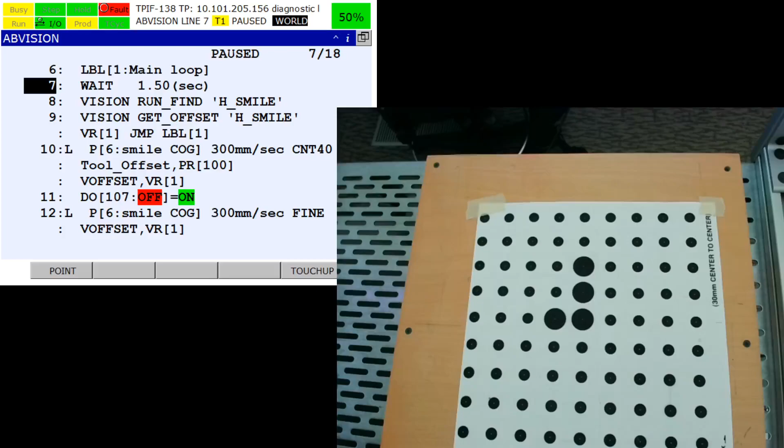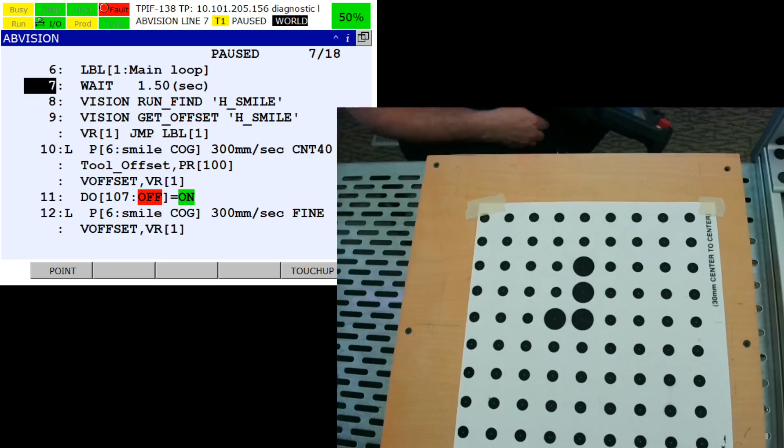Alright, so here we're going to teach a single view vision process. So a 2D single view vision process. So the first thing we want to do is set our frame. So I'm actually using frame 6 here, and I've got my grid set up. And so frame 6 is set up to match our grid.

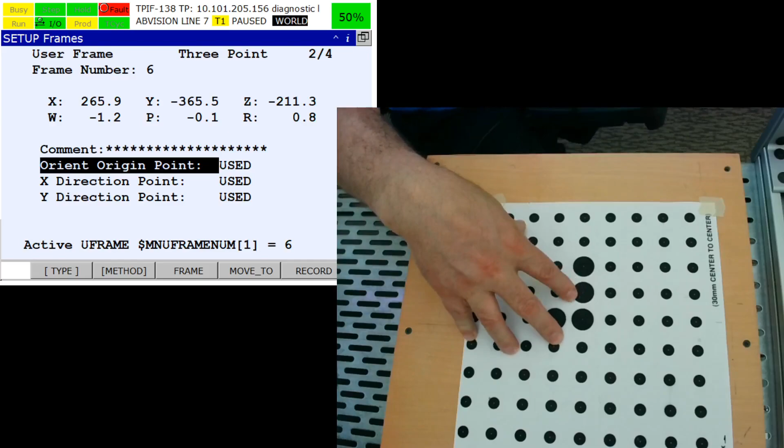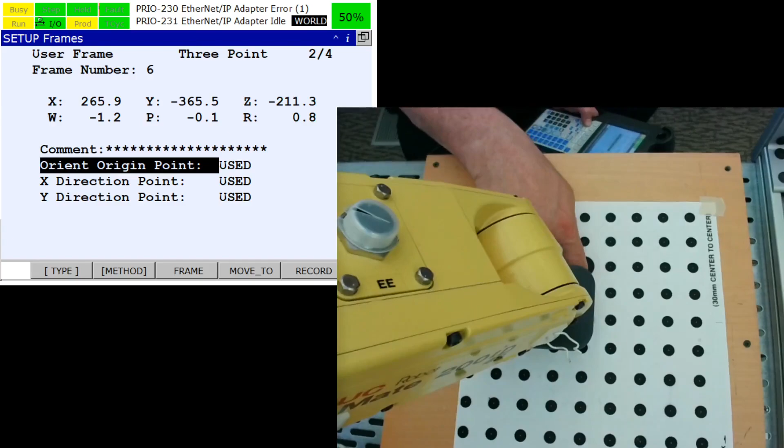And so before you do anything else, you just want to make sure that your frames are what you expect them to be. So I'm just going to use the move to function here and go over here and just kind of show you that that is in fact my origin point, and I can go to my X point and go to the Y point. So you can see that I use the 3-point method here to teach the frame. And so the grid that we're looking at matches the frame.

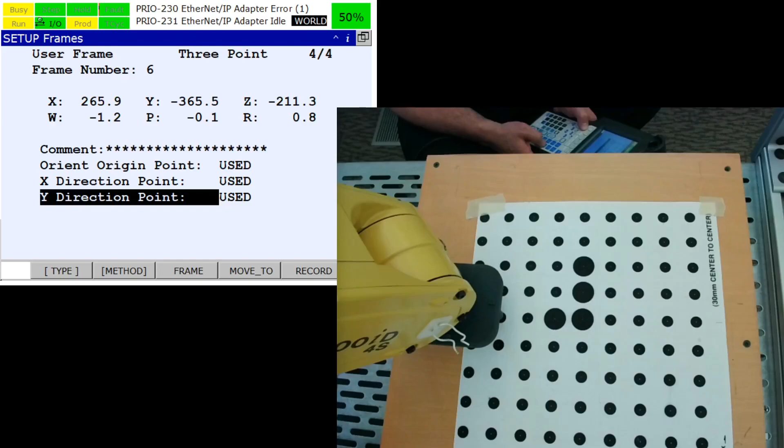And so the next thing that we want to do is teach the robot to pick up a part. Okay, so we want to teach the robot to pick up a part, or in this case I just have pointers attached. So I'm going to teach the robot to see the part. All right, and so what I've got here is this little smiley face that I'm using to teach this. I'm going to teach it to go to the right eye, and so I'm just going to line that up on my grid.

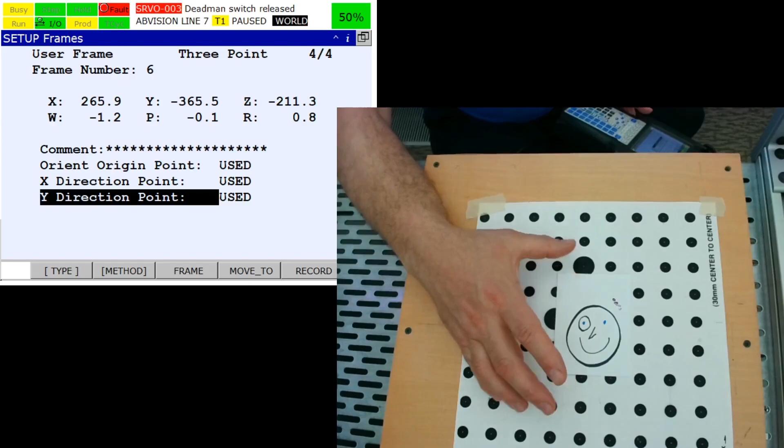So when you teach a part, you want to teach it to match your grid. Okay, now this grid, we need to make sure you calibrate the camera to your grid. I've done that in a separate video, so I'm not going to do that right here. That's already been done. But I'm going to teach this part. But before I teach the part, I'm going to write a program to come over here as if I was going to pick this up.

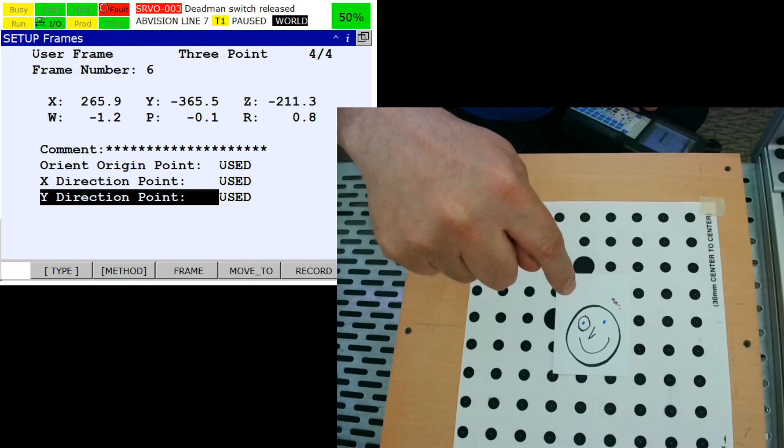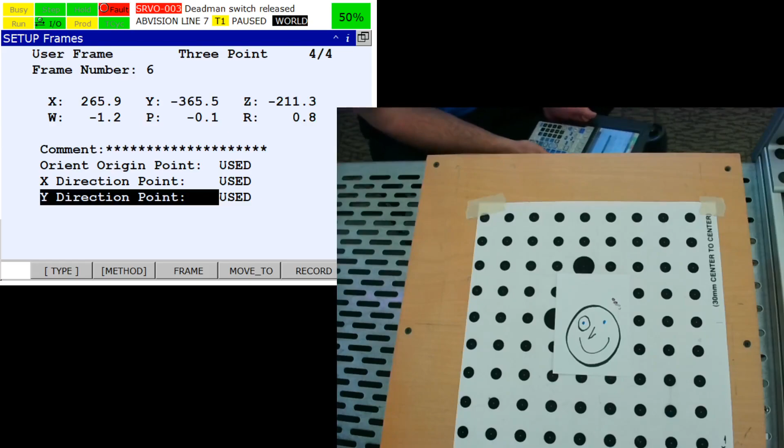And so we need to come over. We need to use a tool offset and then come down to the part and then return to our tool offset and move off to wherever it's going to go if it was actually picking up the part to stack it or place it inside of a CNC machine or robo drill or something of that sort. All right, so I've already actually created the program. The first thing I'm going to do in my program is use the frame commands to set my frames. I'm actually using tool frame 6 and user frame 6.

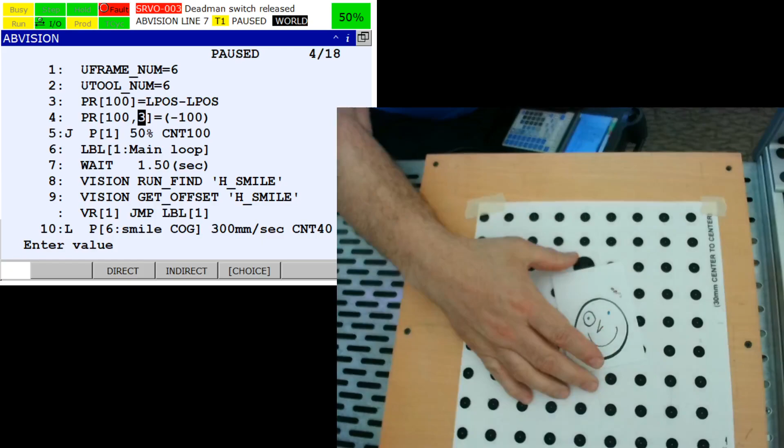And then we need a tool offset. So I've got my position register here, and I'm just zeroing it out. I'm going to use position register 100 for my tool offset, and I'm just using LPOS minus LPOS, which is going to zero out my position register. And this is going to be a tool offset, so I'm going to set my Z value to be minus 100 millimeters, so it'll be 100 millimeters above my frame. Remember, plus Z is up for the user frame, but using the tool offset I'm using a minus Z because it's going to be the offset from the robot.

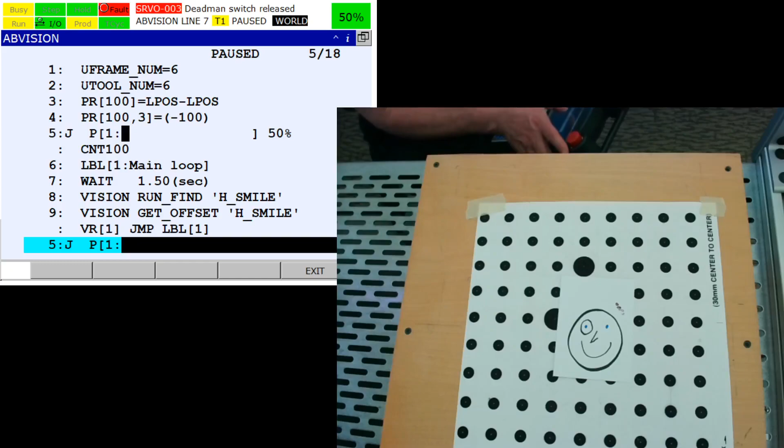So then I have a home position here, so I'm actually going to label this as home position. This is just going to be a home point, and there are two major points about this home point: number one, that this point is out of the way so that the camera can take the picture, and it's also out in a clear area. It's not obstructing the view from the camera, and it's not near an object, so it's not going to hit any object.

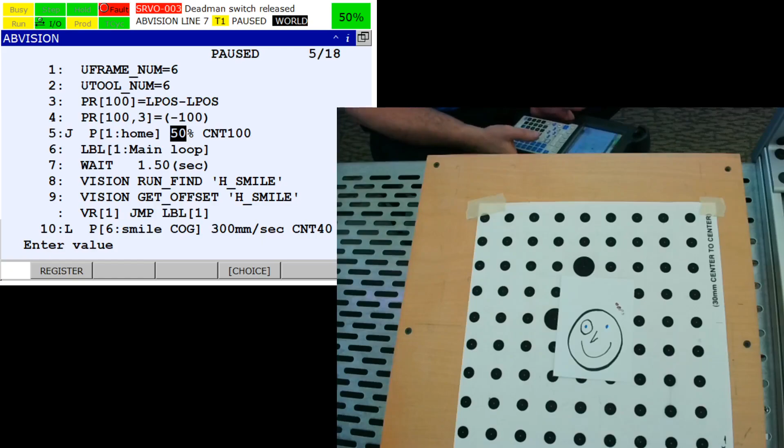So we're going to start the program basically by, after we set our frames and initialize our tool offset position register, just making sure the robot is in the home position in case it wasn't left there. Then we're going to have a label here, so we're going to loop through the program and return back here. And then I have a wait statement here.

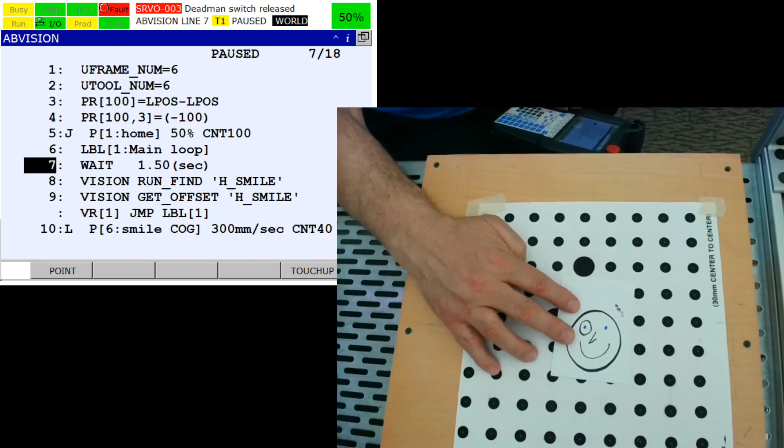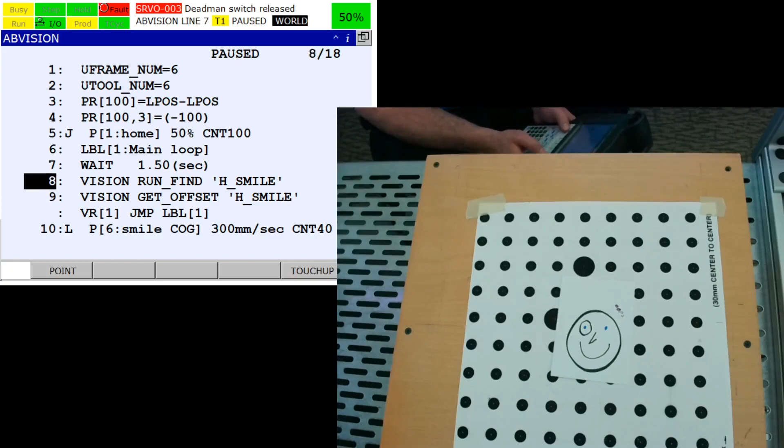Now, a lot of times you may not want to wait, but in this case we're going to be moving our objects around or taking them away and putting them back. And so we need to give it a little bit of time so we can move it around when we're testing the program. That's what I have the wait for in here right now, so it's not really a critical wait. And then we have the vision commands. Now, at this point, I don't want the vision commands, so I'm actually going to delete these out of here for the moment.

Should have deleted both of them at the same time, but I didn't. So, we're going to have our thing. Now I've got the vision offset here, I'm going to take those away.

I'm taking those away because I just want to show you the main program. So I'd already had this working.

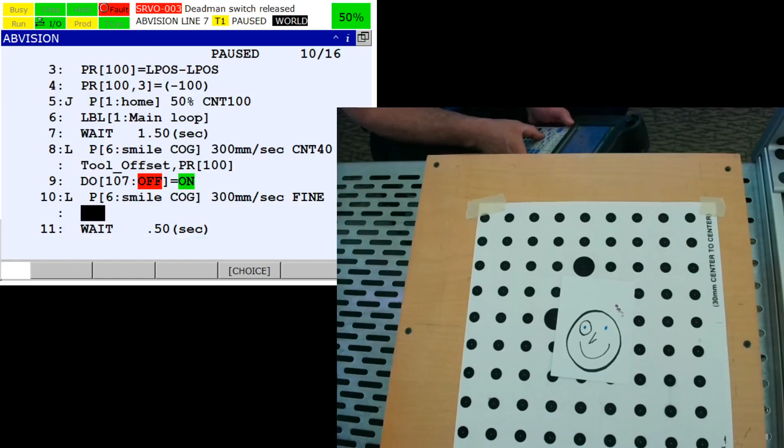All right, so here's my program. What I'm going to do is have 2 points: the home point, and another point which turned out to be point 6 because I started this program from another program here. So this other point is point 6, which is actually just my second point in the program.

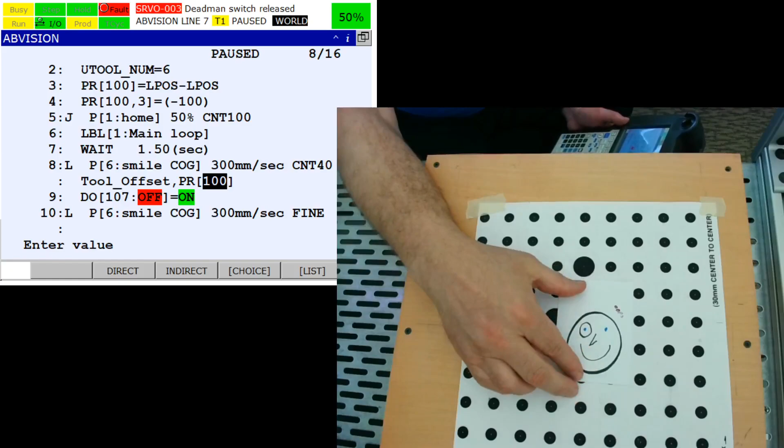But on line 8, I have a tool offset, so I'm going to be 100 millimeters above. And then I'm going to come down to the eyeball, the pupil there. So I'm going to be 100 millimeters above it using this tool offset.

Then I'm going to come straight down to it, slowing down a little bit as we approach. And then I'm going to turn on a light there, and wait about half a second, as if I was opening or closing a gripper, and then move off.

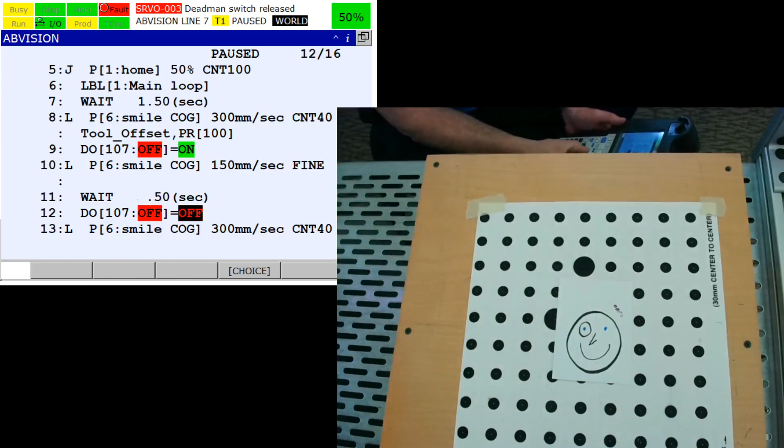So I'm going to move back to my offset, and then in this program I'm simply going to return home and then jump back to the label. So that's all I'm going to do.

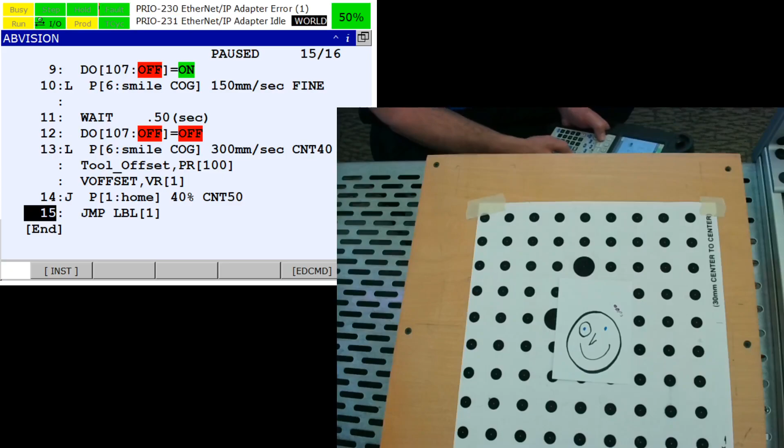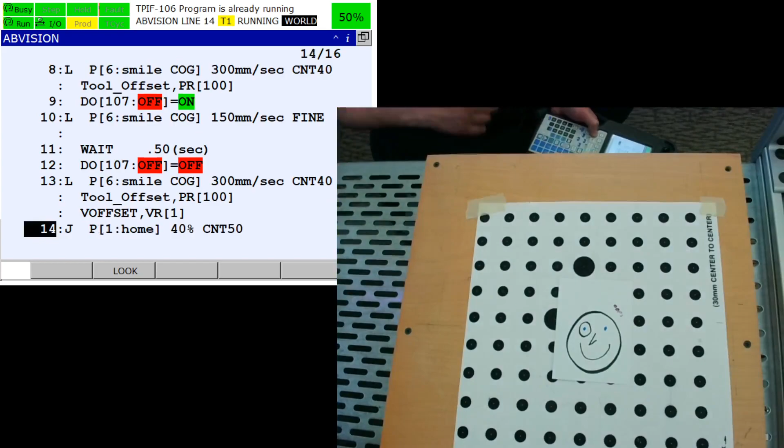Let's go ahead and run this program. Right now this program has no vision in it at all. It just comes over here, goes to the offset, comes straight down, and then returns.

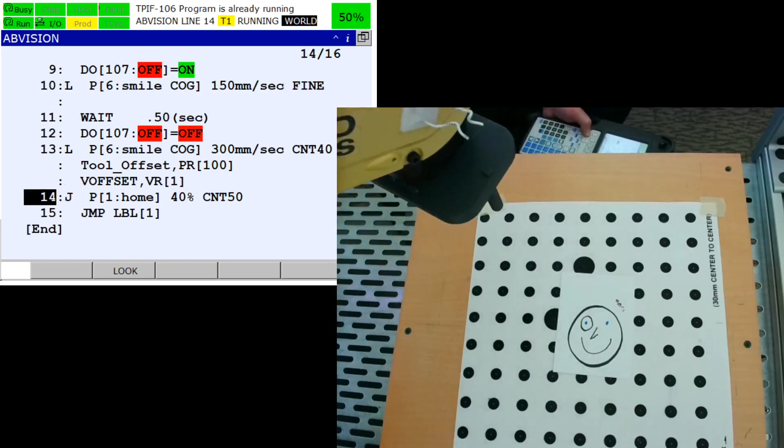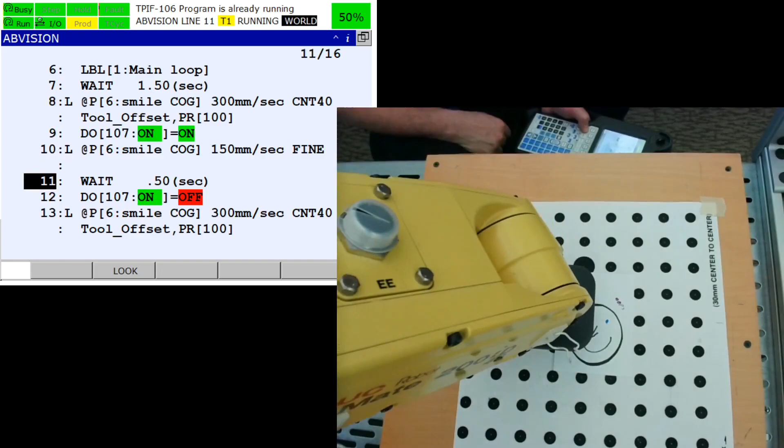It should be returning right to the pupil on the eye there. Okay, so it's just coming down to the origin point on there. So that is the program.

All right, and now we're going to add the vision to it. So the first thing we need to do in the vision is come over to our vision setup.

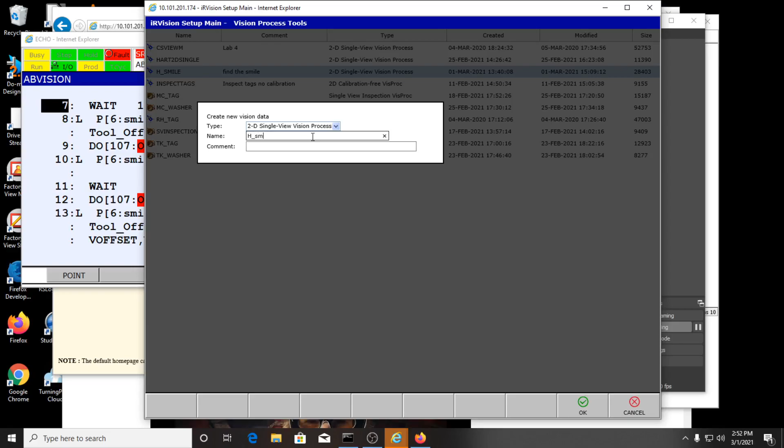Okay, so we need to come over here, and we're going to go to Vision Type, Process Tools, and then create a 2D single view vision process. And I'm just going to call this H Smile 2 because I already have one here.

And I could put a comment in there. And I'm going to double click on this now, and you can see everything's red in here because nothing's really been set. So now I've already set my calibration for user frame 6.

So I need to come here and set my frame to frame 6, and I need to select my calibration here. And so this is my calibration. I may need to adjust my exposure a little bit.

And then we're going to go to our geometric pattern match locator tool, and I'm going to say teach. I'm going to come over here and draw my box just around the smiley face. Make sure you leave a little bit on all sides of the smiley face so it has at least a little bit of, in this case, white color around the dark.

Okay, so here you see the smiley face, and there's some extra stuff up in here. I want to ignore that, so I'm going to come to mask. Now, a lot of times I say mask everything, but in this case, all I really want to do is ignore this over here in the top right corner. The rest of it is actually very unique and very easy to see, and so it matches very well. But I just want to ignore that top right corner, so I'm going to set my mask.

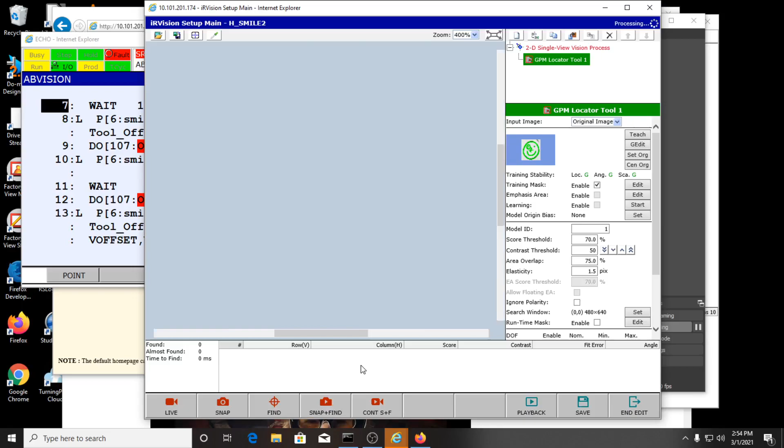I'm going to do a snap and find, and we see there that it's looking very well. But notice the 2D single view vision is still not correct, okay? So what I need to do is come over here and set my reference position and hit OK.

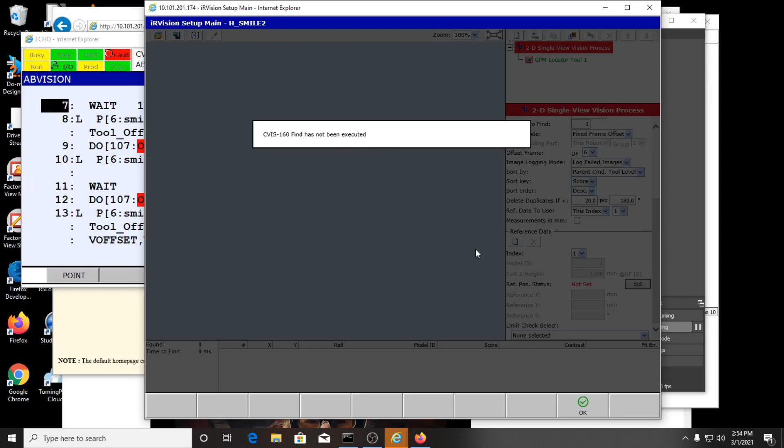But I did set, and I need to read the error message. It tells me I haven't done a find yet. So even though I did a snap and find over here, when you come back to the single view, you actually have to do a snap and find again. Okay, so you do the snap and find on the single view vision process, then you can set your reference position. All right, and so you can see here that the reference position is minus 14 millimeters in the X, minus 13 in the Y.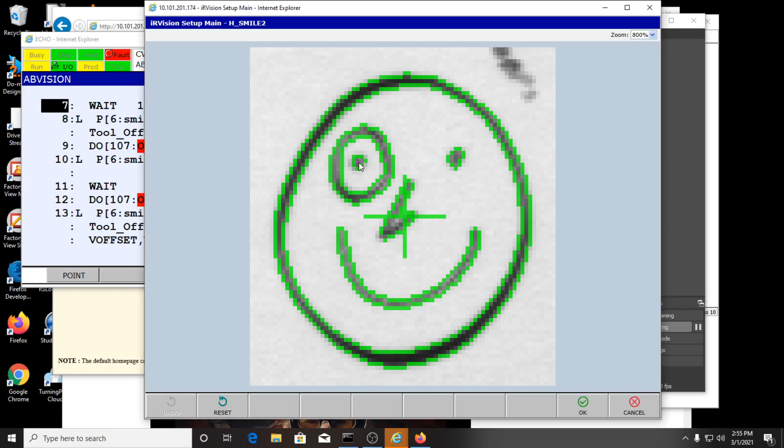Now I want to point out that the reason for this is the origin. So if I come back to my geometric pattern match, I laid this down so that the eyeball is pretty much at the origin of my frame. So I'm going to come over here to set origin, and I'm going to set the origin to be the pupil of this right eyeball. And so now when I come back, I'll do a snap and find here. You can see that the crosshairs are at the pupil of the eyeball now.

So now if I come over here, do a snap and find again, and now I do the set, notice that these values, it's not perfect because I'm a couple millimeters off from my actual origin. But you can see that the numbers are almost zero, 1.8 and 3.5. So very, very small. So instead of being 14 millimeters off, I'm only less than 2 millimeters off in the X and less than 4 in the Y. Okay, so that is my values.

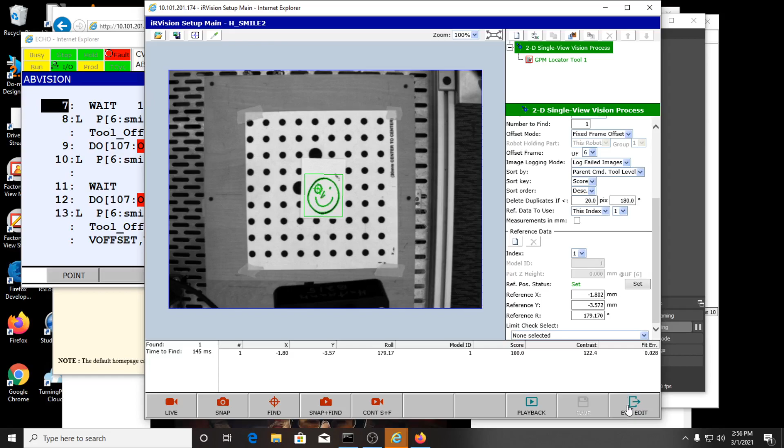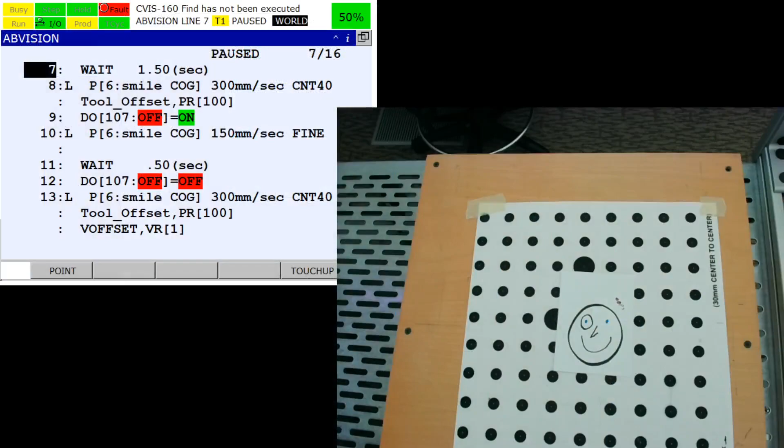Now remember this was called H_smile2. I'm going to save this, and I can end my edit, or I can just leave it open. It actually doesn't hurt to leave it open. But I'm going to come back to the teach pendant here now, and I'm going to edit my program. So I'm going to come here after this wait. Here's my main loop. After the wait, I'm going to insert a couple of lines.

And I'm going to go to instruction. Under instruction, I'm going to come over to vision. And the first thing I'm going to do is run the run find. And my choice there is going to be my H_smile2, which I just taught. Then on the next line, I'm going to go to instruction, vision. But this time, I'm going to run the get offset vision instruction. And again, I'm going to choose my Smile 2.

And what happens now, when it finds the part, it's going to calculate the offset and store it in a vision register. A vision register is a position register that is dedicated for the vision processes. And so I'm just going to use vision register number 1. And if it doesn't find the part, what does it do? It's going to jump somewhere, so I need a label. I'm just going to jump back to label 1, wait a second and a half in this case, and then try the vision, take another picture, and see if I find anything the next time.

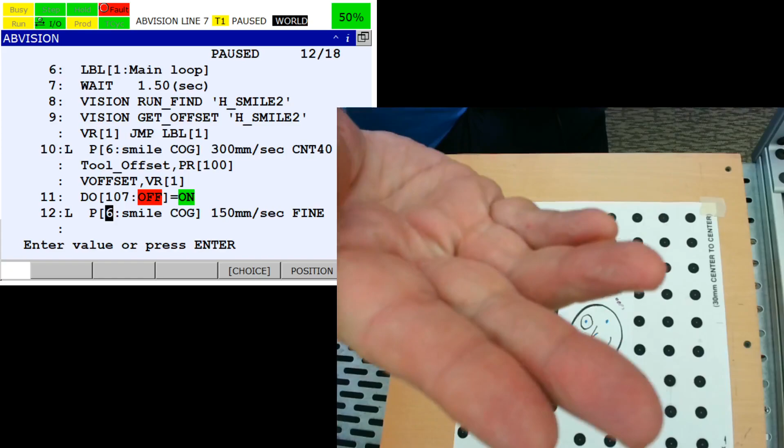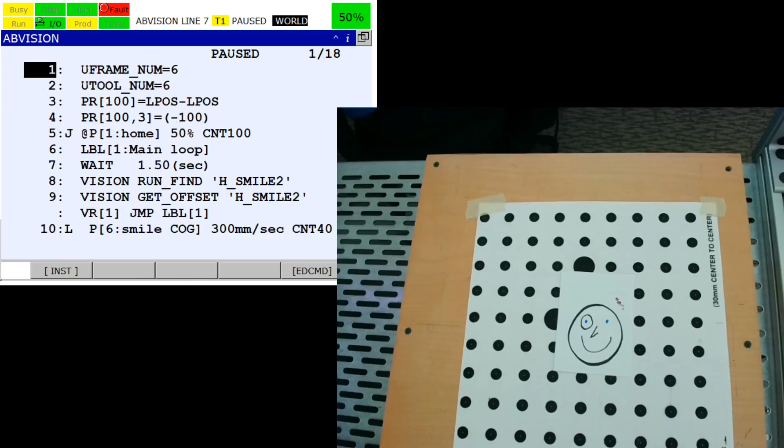And I need to do that for each of my 3 points. I have the point where I'm up top here, 100 millimeters above. Then I'm going to come straight down, and then I'm going to come straight back up. All 3 of those are going to need this vision offset added to them. All right, so all 3 of those get that vision offset added to it. And so now I'm ready to run this.

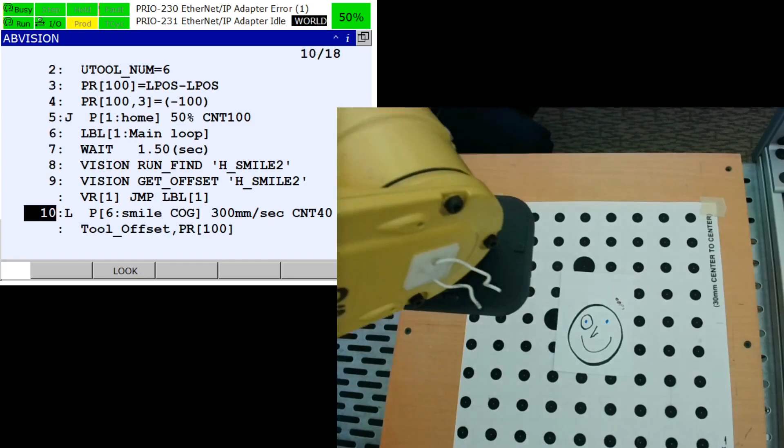Now I haven't actually moved it yet, so it should be pretty much right on the money. It comes down here to the eyeball and back up. So I've adjusted the camera a little bit so that we can see more of an angle. All right, so again, it's coming over here. Look at the command. It's at the tool offset, then coming straight down, and then it's going straight back up, and then it's going back off. And of course, it's just going to repeat that as long as it finds the part.

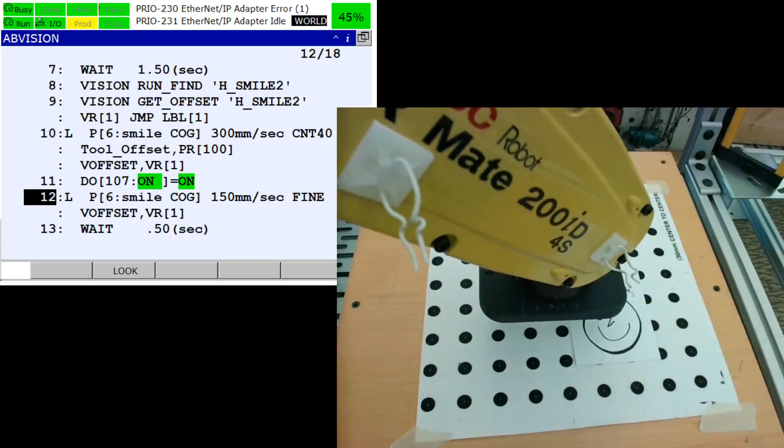So we come down here, and you can see it's going down there pretty much right on the eye. And so if I move it a little bit, it should make the proper adjustment and move on over. Okay. And if we rotate it some, then you're going to see it's going to rotate the tool to compensate.

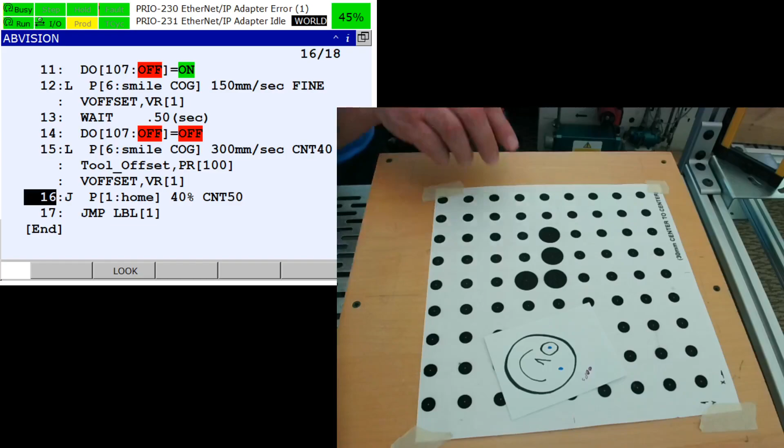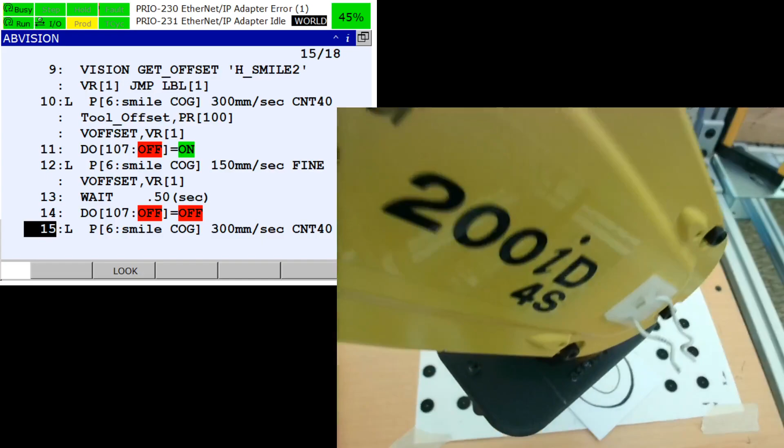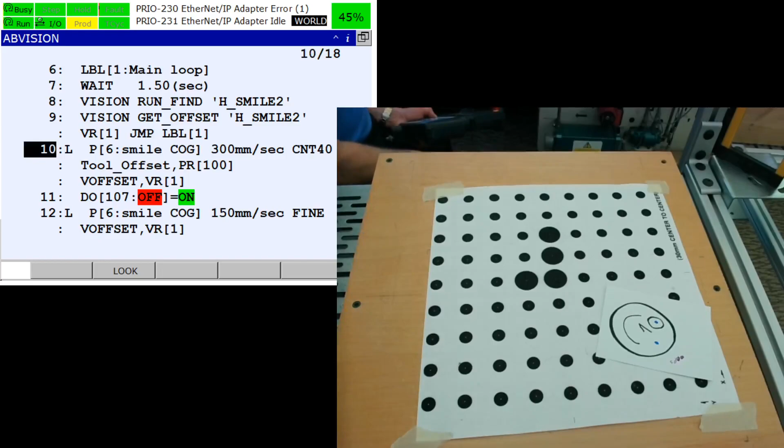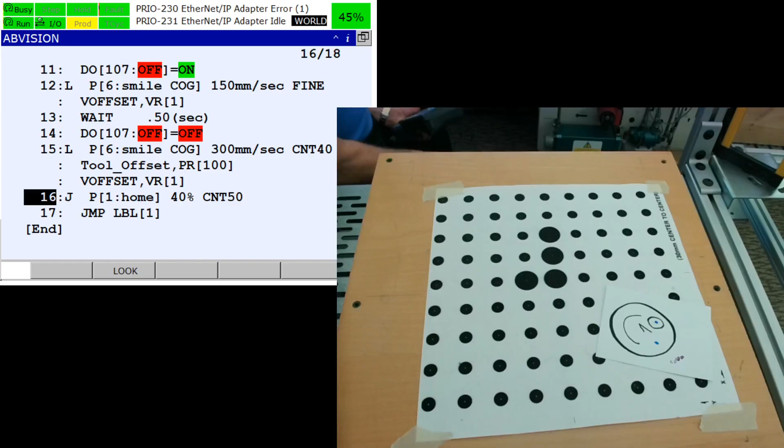So I just tried a couple of different rotations here. Right in front. One more try here. All right, so that is how you set up a single vision process.

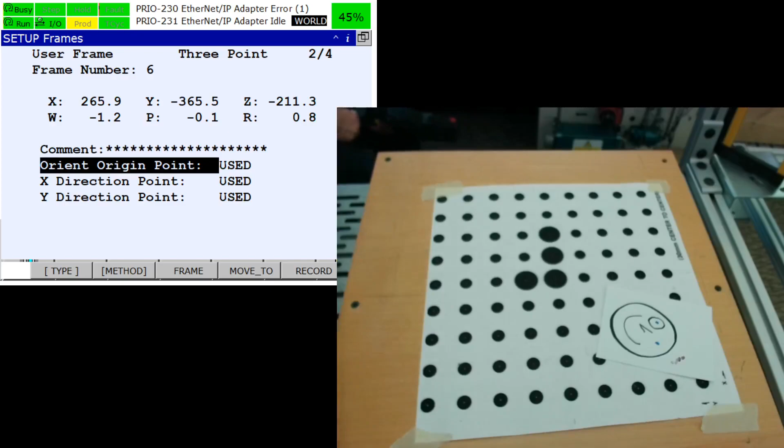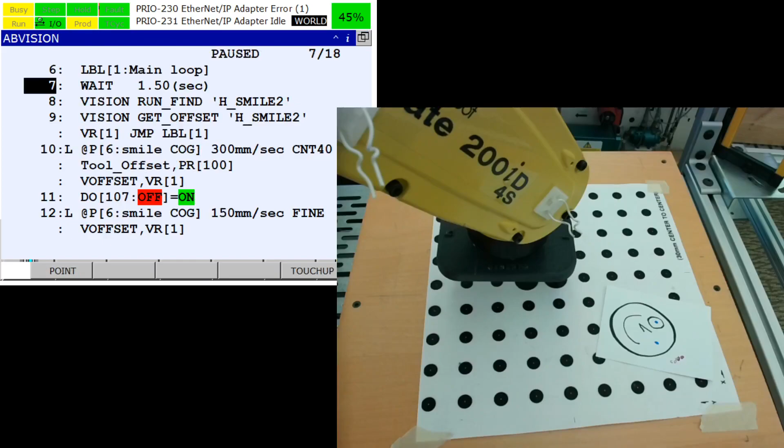Okay, so let me just reiterate here. One of the key things that you need to make sure that you do is start by double checking your frames. So go check your frames, make sure that your frames are where you expect your frames to be. Technically your frame doesn't have to match your calibration grid, but it's a really good idea if it does. It just makes things run a little bit smoother.

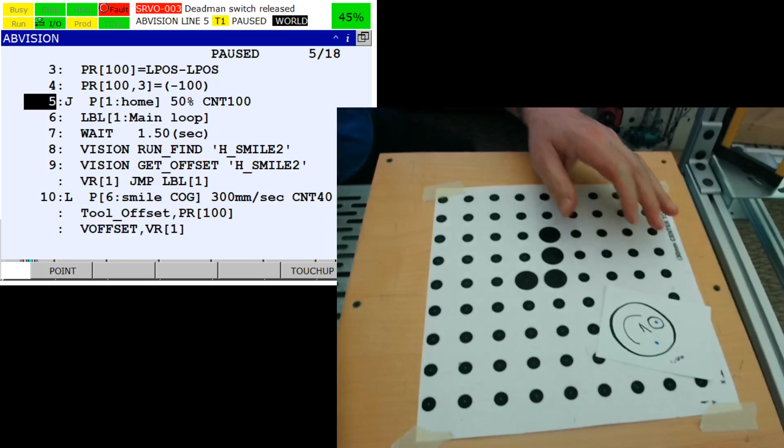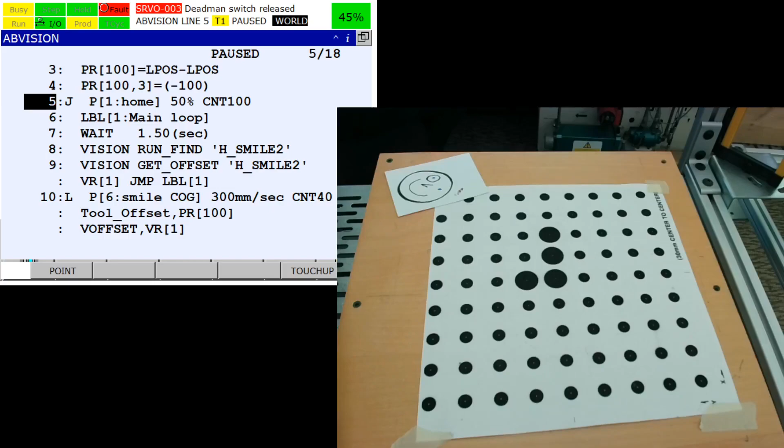Okay. So the other thing is that you have to make sure that your grid has been calibrated and not moved on you. And then you create your program. So the program should just go over to the part. It should use a proper tool offset before approaching the part so that it comes straight into the part and then leaves again straight. So remember, these are linear

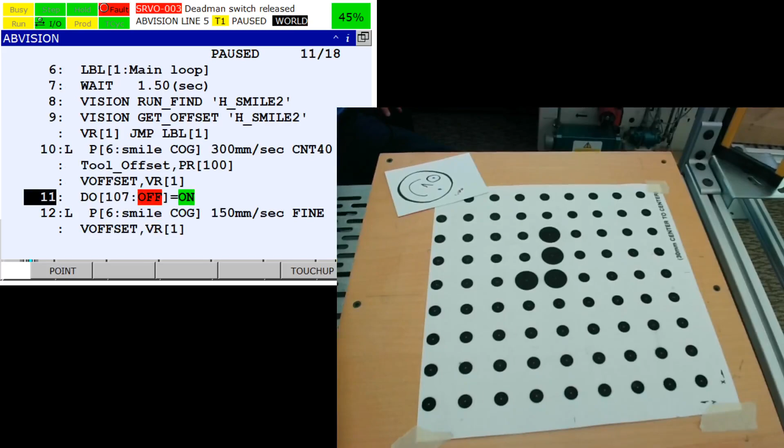straight down from your tool offset to the actual point where your tool center point would be on the part where you want it to be to open or close a gripper or process the part, whatever you're doing with it. And then return to that tool offset and then move off to wherever you're going to be returning. So you write the program, just an ordinary program without any vision.

Then you teach your part. So we would come in here, we would create a new part if we needed to. And then we come in here under the single view process. The first thing we had to do was choose our calibration. So we make sure we choose our calibration. Then we come in here, we teach our part, okay? And I don't want to reteach it at the moment.

But when you teach the part, make sure that you leave a little bit of area all around your part in your teach box. And then if you need to, you may have to come in and mask out some areas or mask out most of it and then just unmask the parts that you care about. If you wanted to, you could do an emphasis area, just like we discussed in the previous videos. And then you can adjust your thresholds and that kind of stuff as necessary.

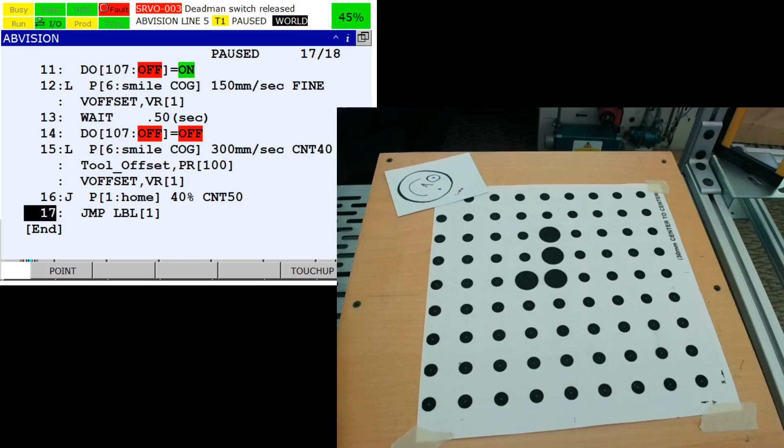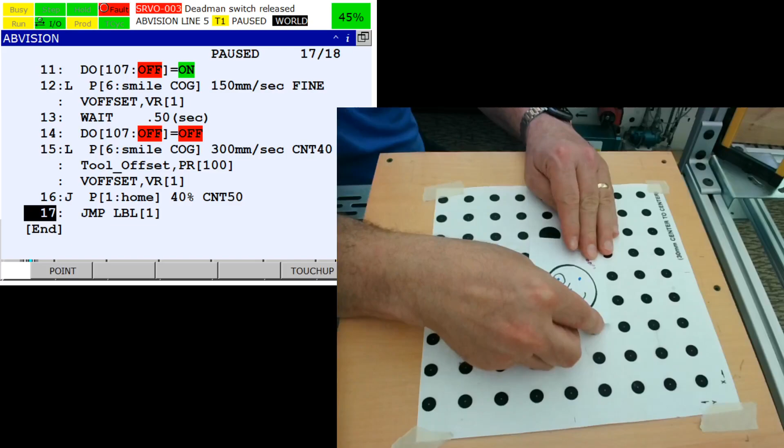But then you come back to the main single view. You do need to do the snap and find. And then when you do the snap and find, you need to set your reference point. So right now, if I set this, you can see these numbers are just out of town. So remember, to do the snap and find, you want to really put that part right there, line it up on your origin, and do the snap and find.

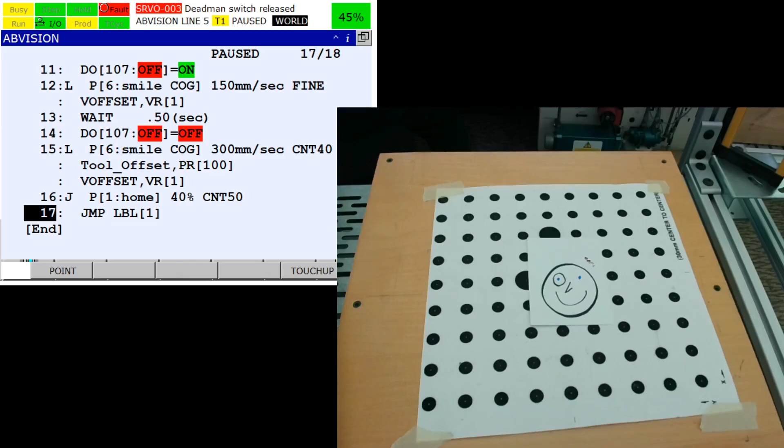Okay, as you can see now, I've got that lined up pretty well. And then do the teach, and you see here that was even a little bit better. I've got my X reference down below 1 millimeter and my Y reference down below 3 millimeters. So you really want to have that as close to 0 as possible.

One way that I recommend doing that, if you actually have a gripper attached, is turn the gripper on and have the gripper place it at the pickup point. So actually put the part in the gripper exactly the way you want to pick it up, and then run the program without any of the offsets, to have it move down and place the part exactly where you want the gripper to be grabbing that part. I don't have a gripper currently, so I can't do that, but that's what you want to do.

If you have a gripper, make sure you place it in the gripper just the way you want it, and then run your program just to the point where it puts it at the pickup point exactly where it should be, and then manually release the gripper and back the arm away so that you can then take your picture. That's when you should actually take your picture for the teaching section. And that way your reference should be virtually perfect.

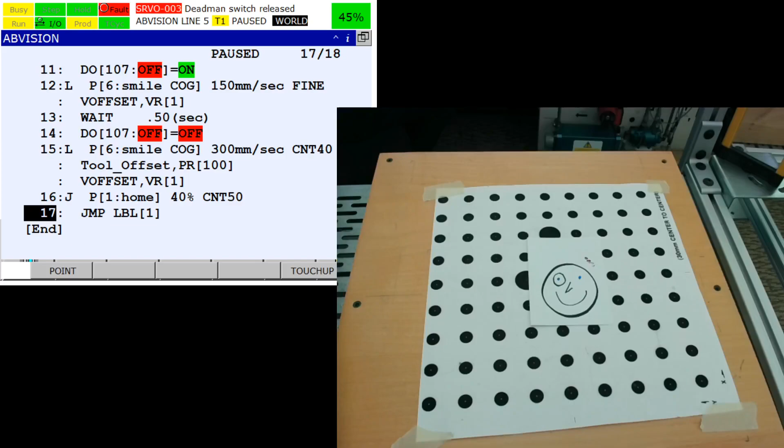And then make sure you save that, okay? You don't actually have to leave it, so you can leave this open while you're testing it. Just make sure you save it anytime you make any changes in here. And then I'm going to exit without saving now because I had it working pretty decently. And that is the program.